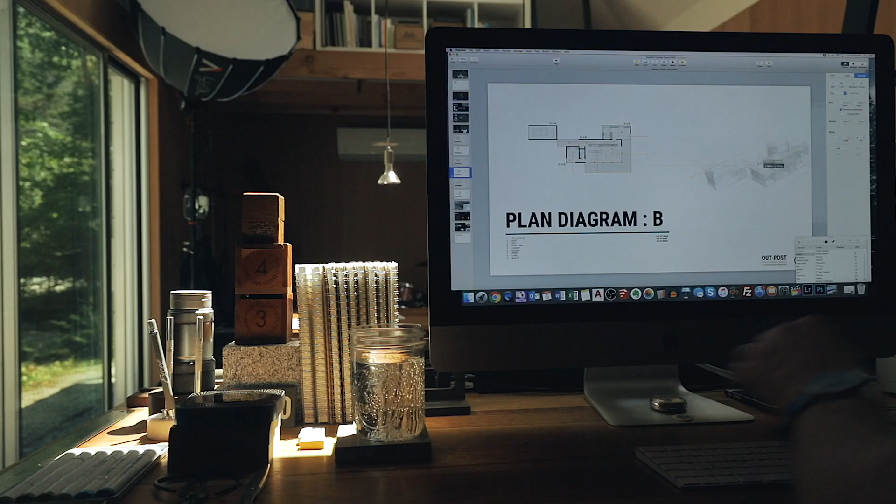Now I don't want to show up to the meeting with anything solved necessarily. That's why I have monochromatic SketchUp models. Models are loose. I'm not defining what the materials are. The materials could be anything, but that's going to come as a result of our collaboration and our dialogue. These are things it could be, and then we decide what it should be together. The idea is that we're all sitting at the same side of the table and we're working through the design problems and challenges together.

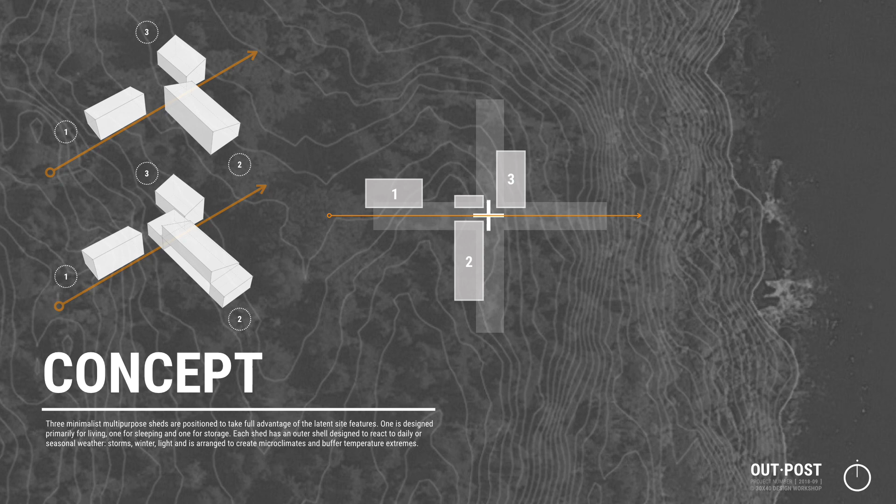What this concept does is it creates this cruciform shape, and you'll see that present in each one of these, where the spaces start to pinwheel about that cruciform shape. I've chosen the shed just because we've been talking about maybe a more modern expression. I think a shed has a place both in vernacular building typology and also modern buildings, and it also helps to orient to views. You can capture light, so we can build clerestories. There's all these opportunities for shaping space and collecting light.

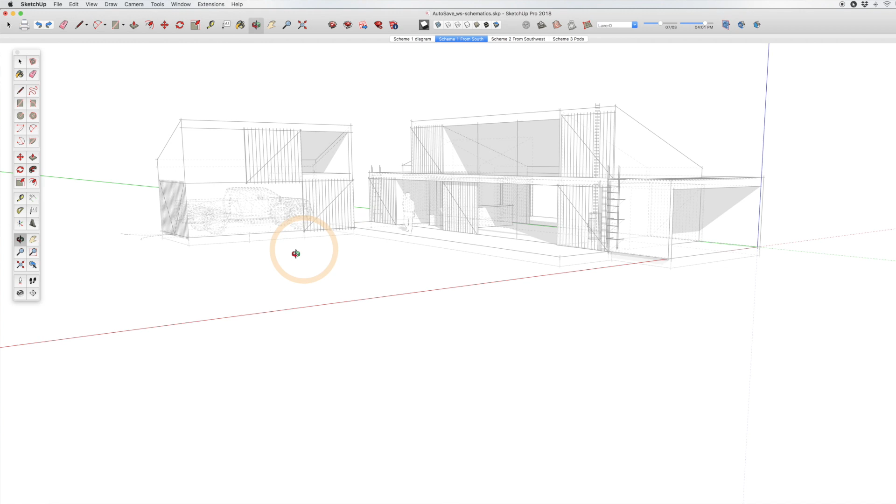So for example, in this particular plan, this is, say, the garage piece. When you face that south, that's bouncing light into a protected courtyard here. So if this is in the lee of those strong winds facing this direction, this creates a nice outdoor space when the wind is blowing off the water. To manipulate these very simple volumes around creates complexity from its orientation to the site.

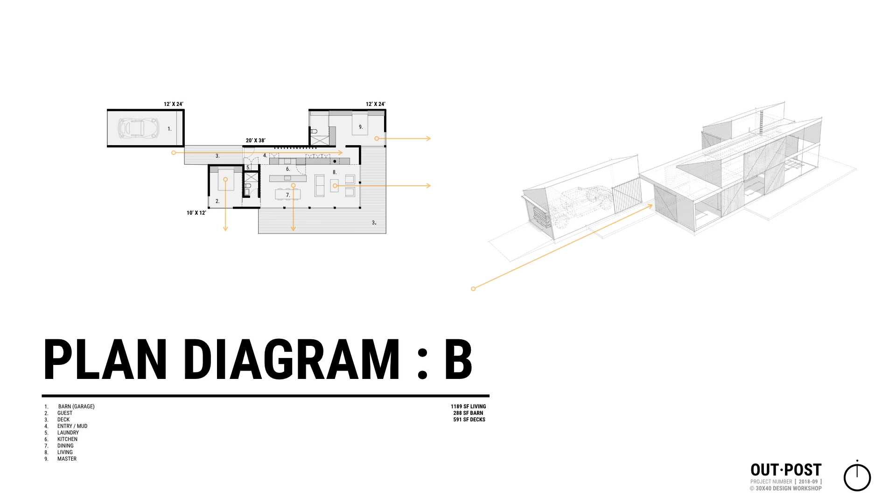Nice, I like it. This then feels like this solid element, and it feels like it's in the right spot because it's facing north, right? Yeah, there's absolutely no reason to have it anywhere else. Sure. This one doesn't give you a lot of ocean view. You're really facing more to the south.

Okay, so let's go to this one. Oh, okay, so this tightens it up. So now we're kind of splitting. Instead of having it all just splay out this way, now we're making an L-shaped form. Yeah, so let's look at this here.

We walk through each scheme conceptually and quite literally room by room in the floor plans and models. And we quickly settle on one that seems to be the favorite, except for one important omission.

Okay. Where's the screened-in porch? Okay, there isn't a screened-in porch, and I must have missed that in the program. Oh, you've got to have a screened-in porch. But it seems like it's a need or something, at least. It would be really nice, yeah. Do you have a screened-in porch at home? I don't. No? Do you wish you had one?

This time of year, between black fly and mosquito season, that's when you want it. It's just the four weeks.

But what I don't like about screen porches, this is one of the negatives, is that you are always looking through them somehow. And if we were to make this into a screen porch, the inner sanctum here is darker because of this. So I think it's a trade-off. Good way to see it. And there's another way to do it.

If you can create that your living space can be sort of like a screened-in porch, if you have enough sliding doors, perhaps, or sliding or opening windows, where you have enough screen and airflow, where you actually feel like you're outdoors without being outdoors. Yeah.

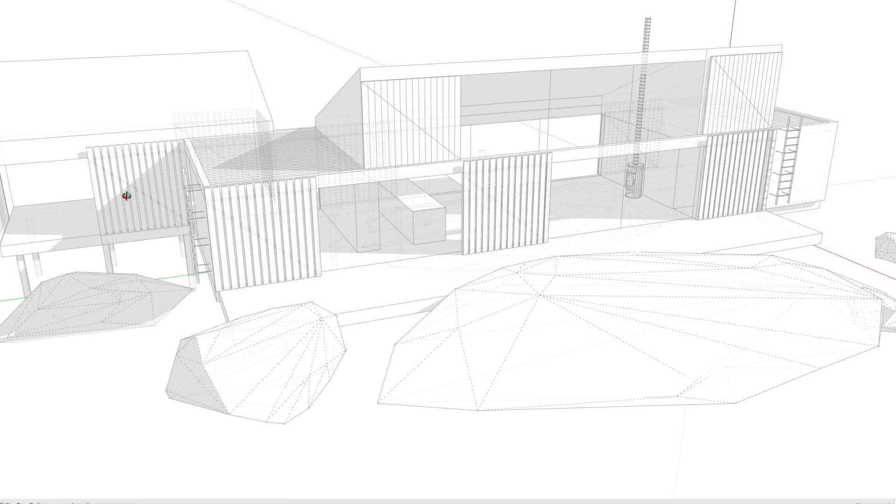Yeah, I think that's a cool, different idea. I would totally do that. Keep the structure overall in line with your other design elements. You wouldn't see it from the house unless you were way up. We'll show you when we get out there.

I don't know, but that seems awfully close to me. Close to what? The house or the ocean? Close to the water and everything, and there's the high wind. It would take a beating during the winter, but you can close it up.

Screen porches, you can have elements that are sort of boarded up, or you can do the same idea he's created on the house here, where it's a sliding door. That'd be ugly for anyone to see. What would be ugly? A boarded up gazebo on the side of the cliff, is what you're saying.

I don't know. It's got- you think about that though. I do. Anyway, I don't know. Canvas, you could do canvas, like roll it up, sailcloth or something cool. Yeah. I mean, I don't know. Yeah, that could work. Anyway.

I think that could solve our screened-in porches just a few feet down here. Oh, okay, cool. So where would you guys put it, if we were looking at this? That's exactly the problem. So it could go here, right? But then it's very different though.

I just want to think it out loud a little bit. Thinking about the way it acts at home now and how we use it, even before this. We eat in it, we do all that sort of thing. I'm not going to be hauling our meals down there, and you know you wouldn't either. So it won't behave in the same way.

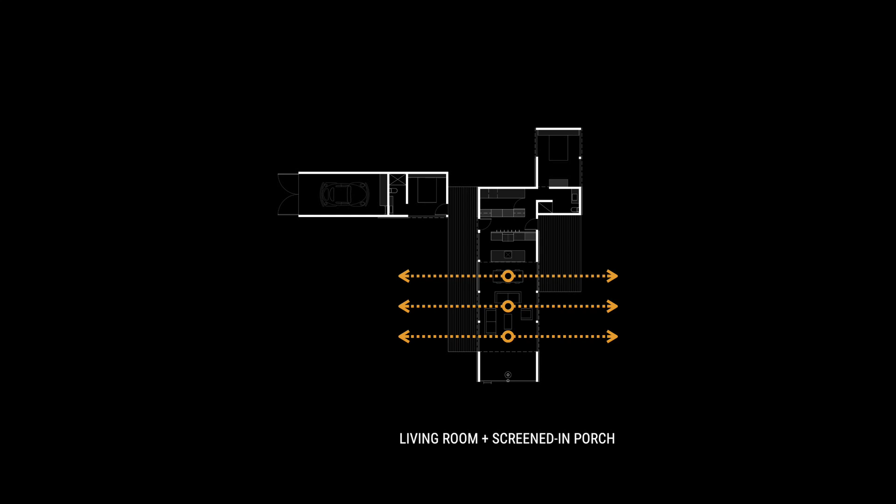But I get the idea that would work, but it's not the same as a screen porch. Definitely not the same. If I were looking at this for a screen porch, this would be awesome. I would say over there, that's the only place I can think of.

I could also see it being here because it looks out, but it's got a northern aspect, it doesn't have any view. That's the bummer about that. You'd want to go where the view is.

So if you want it where the view is, then you're looking at over here, right? And that's prime territory, and you'd be looking through that unless it's a more solid structure, like it does at home. It could go at the end of this portion. But when you're out there and you really want good, clear viewing, a screened-in porch does block it.

All right, well, carry on, Eric. Okay, this is great. I love it. Really great. Okay, cool.

Staking out the design full scale on site helps us to set it in the context. It makes it real, and it also presents some new options to tweak and improve it.

I'm just wondering if it needs to slip this way because of the garage. We can work in there and we could tilt it like that. I think that's fine, definitely shift it over. It's definitely down beyond here.

If this is the end of the master, this face is aligned here. So you'd really be arriving, because remember, this would be the entry, looking out in the space between. We'd be looking towards... oh, sorry, I totally misunderstood, this is way over here.

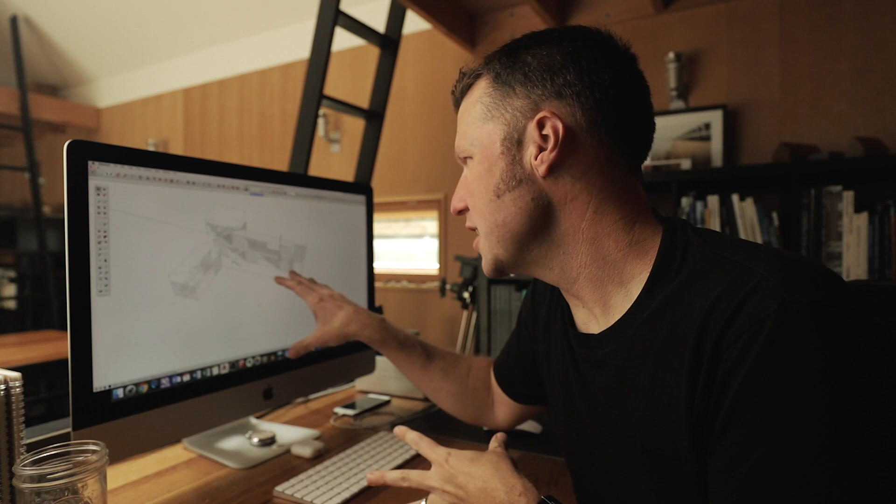I think the design got a lot of things right, but when we got out to the site, what we realized was in this whole area we were creating, this protected courtyard, had this beautiful granite whales back and this glade of spruce trees, and at this corner there was a giant granite boulder that was an erratic. The courtyard was too constrained by all these beautiful site features.

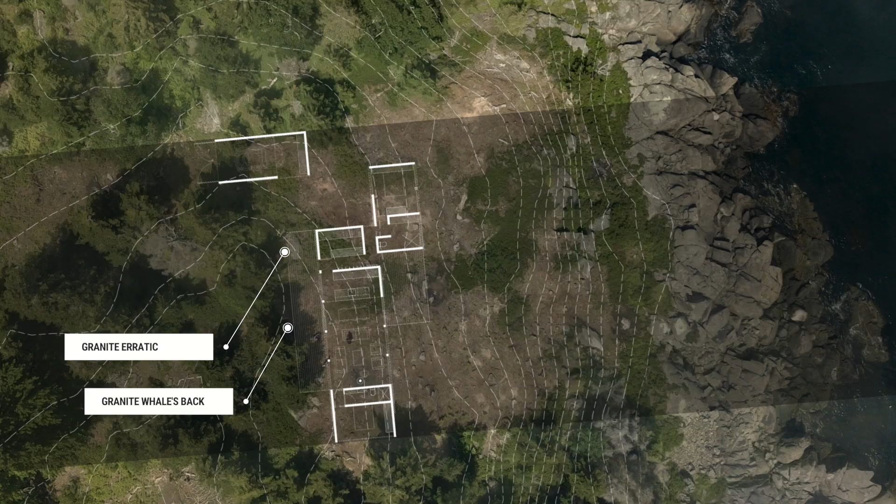So all we did was push this barn piece down the hill, and we made the entry court more like shaped like this. In this updated model, this is the granite whale's back, that's that giant boulder. We slipped this garage piece downhill, and then we actually tipped the roof that way so we could use it for solar panels.

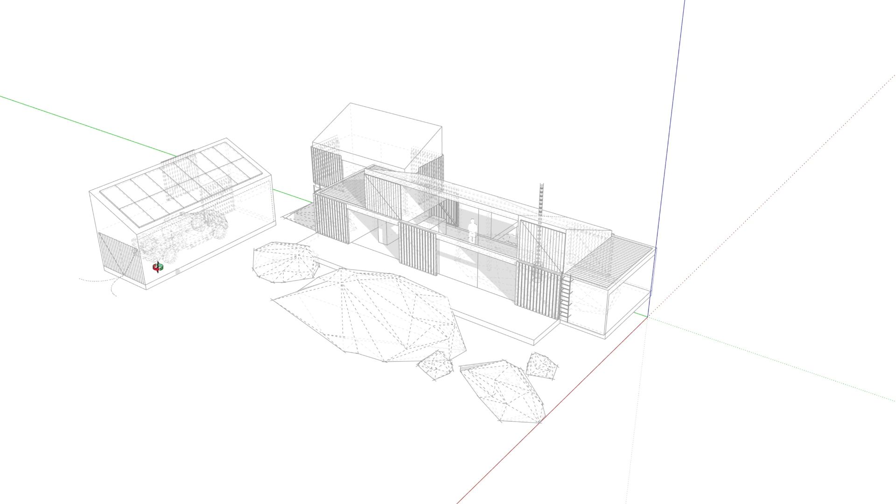So by doing this, we're shifting the entry courtyard now to be bound on the north and the east by the house, and that filters your experience of the water view. And on the west and the south by the organic edge of the site, and this entry will be reshaped to conform to this erratic that we discovered.

Yeah, and I like the idea, this could be notching around this big stone up there. This makes so much sense though. It feels good here. It does, when we walk it. It's kind of nice that it's the bounding edge of this. I love that. I think it's awesome, like it feels really knit to this spot.

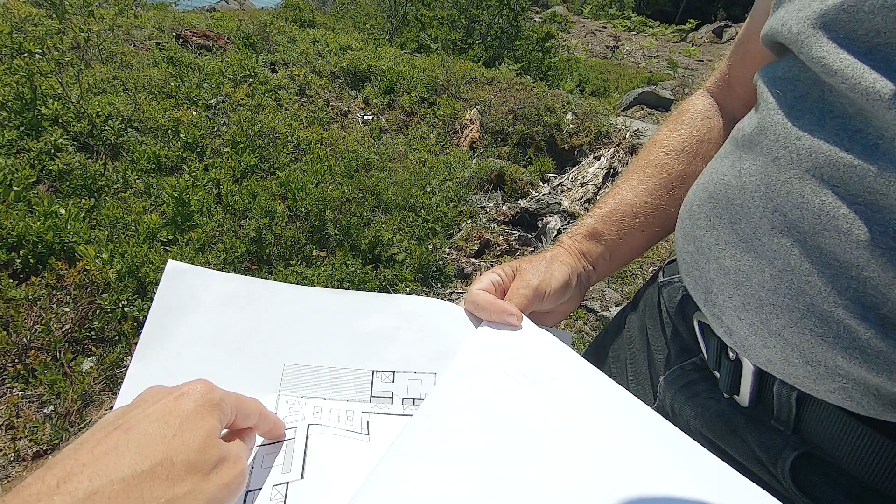And these are among the most gratifying moments for me as an architect: walking the site, listening, reacting, and revising. There's that moment when an idea takes root and it's no longer just an abstract notion, it starts to germinate new ideas. And it's all fleeting, really, because soon enough all the talk and the lines on the page become real places, like screen porches.